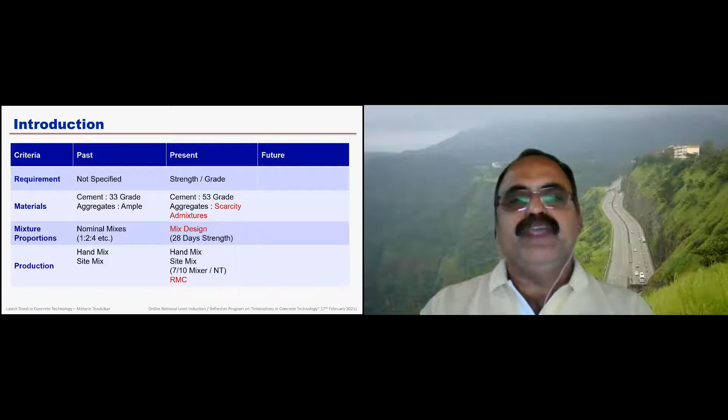Now in the present stage, we talk about strength of concrete: M40, M60, or sometimes M80 also. We have very good cement; the cement industry has had a revolution in our country, with latest plants available. But everything is not going in a good way, so we now have the problem of scarcity of aggregates. We don't have ample choice; we have to select proper aggregates from the available sources, whereas earlier that option was available. Admixtures are now coming into the picture—without admixtures we can't think of producing concrete today. Everybody is talking about mix design at the strength of 28 days.

Ready-mix plants are the latest technology in the last 15 to 20 years in our country. But what will happen in future? That is very interesting, and it has already started.

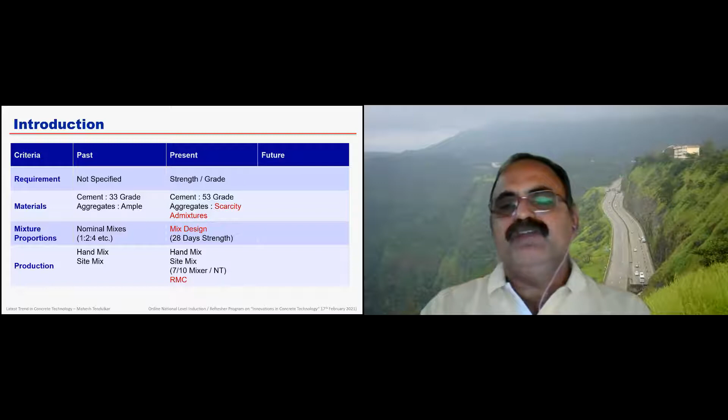We are now going back to performance-based concrete. It's not about what grade of concrete, but about durability of structure and service life of structure. We want the structure to withstand 100 years, 80 years. So we are going towards durability of structure, and for that we have to use supplementary cementitious materials. For aggregates, we are now producing crushed stone sand.

Natural sand is nowhere to be found, almost banned in full Maharashtra and even in some other states. So we have tailor-made admixtures. We have to specify our requirement, and then the admixture company will formulate admixture to suit our requirement. So everything is becoming performance based.

We don't talk about 28 days strength only anymore. Sometimes for one shutter we want 24 hour strength, 3 day strength, 7 day strength, 14 day strength, stressing strength, 56 day strength. So performance-based mix designs are now required. 28 day strength was only a criteria to fulfill the designer's requirement, but now we want strength at various ages to fulfill the execution stage.

In the precast industry, this is becoming more vital and more crucial. Hand mix, RMC plant mix, site mix are all there. The new thing is that dedicated RMC plants are now coming into the picture.

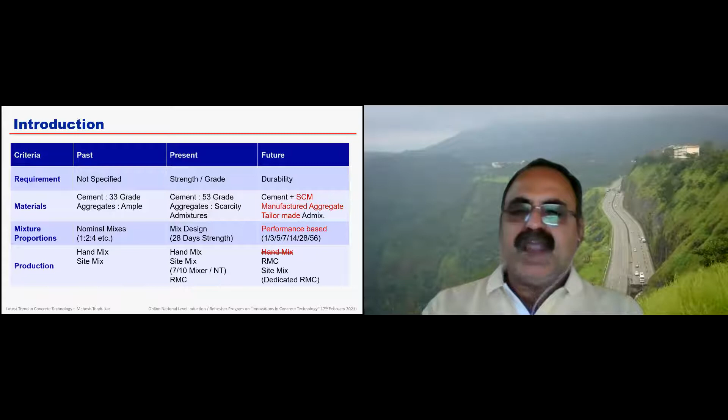But still, as a professional, I have a little worry. I feel our code should ban hand mix concrete, which is not yet done. Our code still allows hand mix concrete. It is very, very pitiful that we cannot have good durable structures with hand mix, and yet this continues into the future.

What about apart from material? Quality control - nobody was talking about quality control in the past, but at that time workmanship, supervision, performance of structure was excellent. Many times people doubt this, but we have structures built in the British era still standing in good condition, whereas structures built in the last 15 to 20 years are coming down.

Of course different aspects are changing because we don't have good workmanship nowadays. Laborers are not available. Good supervisors and foremen are becoming a community that is absconding from the site. Nobody knows what a foreman is anymore.

Then cube test is now being taken over by NDT. So how far is that NDT to be believed? Again, that is a big question mark. So this is what is changing.

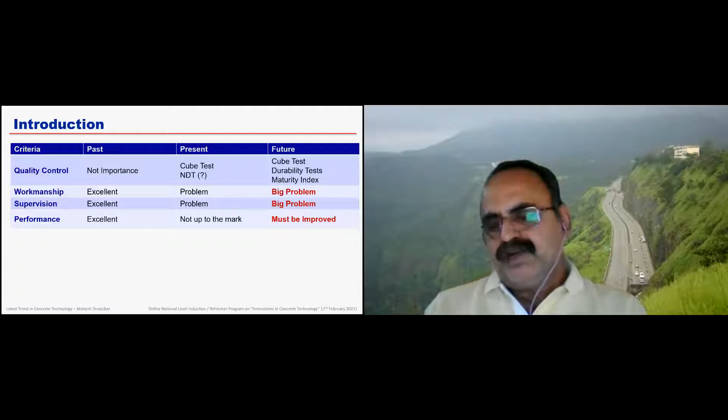But what will happen in future? Not only cube test, a lot of durability tests will be specified. Because if you look at the durability of structure, our main culprit will be corrosion of reinforcement - airborne chlorides, water-based chlorides, concrete chlorides, inbuilt chlorides. So we have to mitigate the corrosion aspect.

So a lot of tests for durability will come into the picture - water permeability, or chloride penetration ion tests. There are different tests that will come. Of course, a very new concept which will come is the maturity index - to know the strength of in-situ concrete by placing sensors.

So on one side we are doing a lot of innovation and modifications in materials and concrete production, but our main worry is going to remain workmanship - our training to these workers, training to supervisors. That will be very, very crucial when we talk about durable structures.

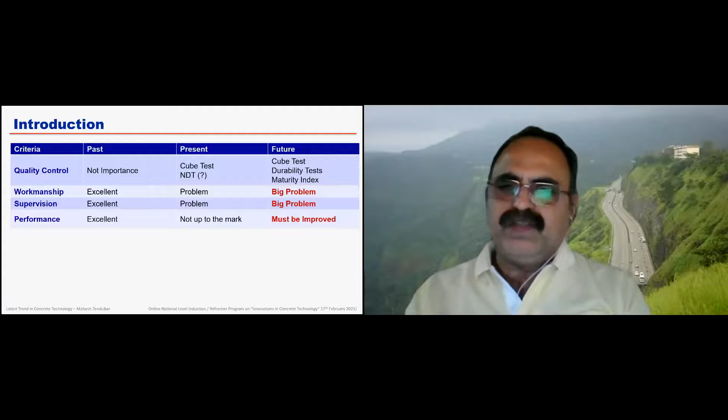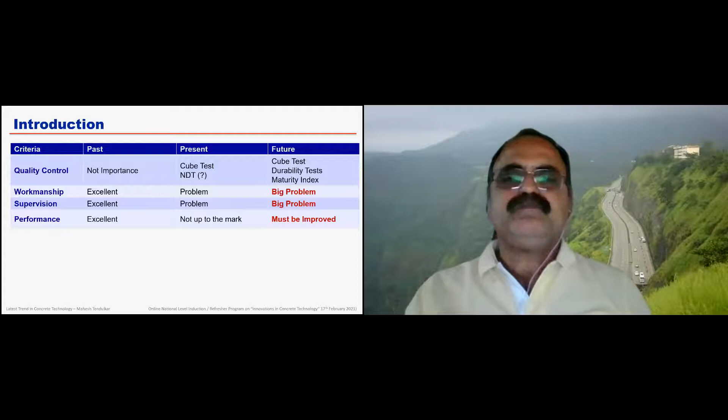So whatever we talk about as latest trends, we should equally talk about training for the ground force, which is very, very important in durable structures. I always say it is like KYC is important - but this KYC is slightly different in our case. Our KYC is 'know your concrete.'

One must know our concrete at the plastic stage, when concrete is green and not yet set. It has a life of about 3 to 5 hours. So we must know the properties of our concrete in the plastic stage.

At the same time, we should know about the properties of concrete in the hardened stage. Again, that is crucial. Cracking is a problem - we must know the microstructure of our concrete. This is very important when we talk about durability or the future.

So why concrete? Because if you see, concrete has a great future. I always say in the industry, civil engineering is the best profession, which we have experienced in this last 1 year of lockdown.

Everybody can work from home, but we can't work from home. We have to be there at site, and then only we can have this.

Any structure, whether it's a metro, infrastructure, airport, bridges, dams, of course all these are apart from residential, everywhere the core remains is the concrete. So one must know concrete in a very methodic and scientific way.

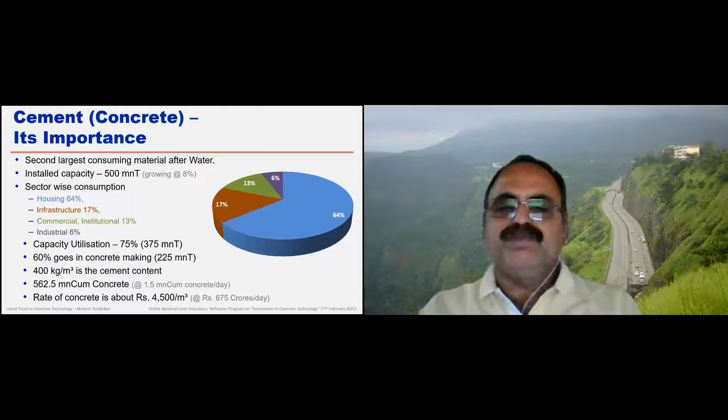And how much importance do we give to the development of our knowledge in concrete? Hardly anything. So this is very telling — we should have a lot of knowledge about this concrete. And this is what we are doing.

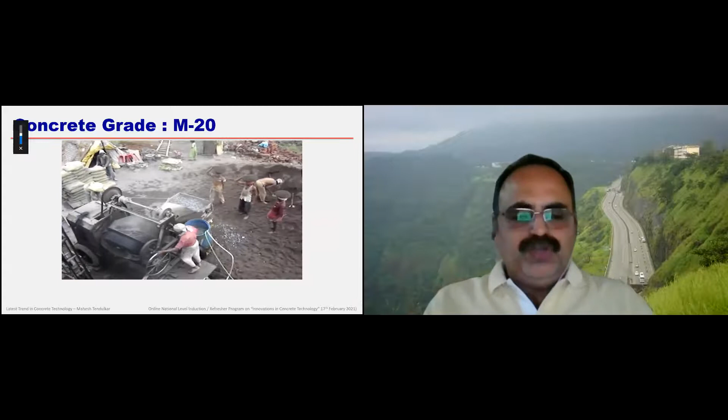So this is normal — I am showing you, not any project or commercial site, I am showing you by and large. I hope this video is slightly clear. This is concrete production in more or less all district places in our country.

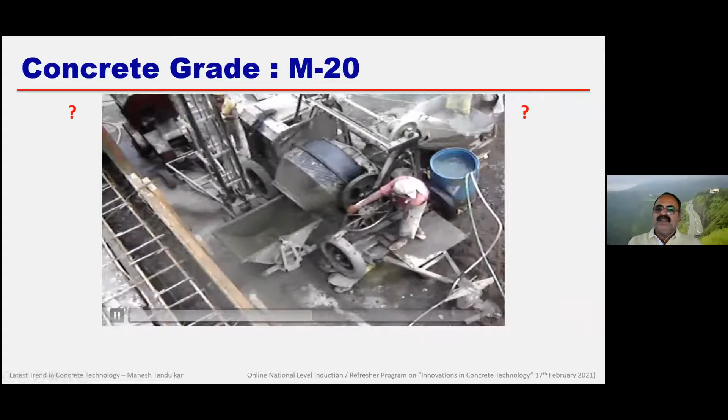So who is the quality control engineer? The person who is driving this mixer. We can't say much about this concrete — this is M20 grade concrete, one slab being cast in a district place in Maharashtra, in Nasik. You can see this concrete is poured in the slab, and being a civil engineer, there was a curiosity about what the strength of this concrete would be.

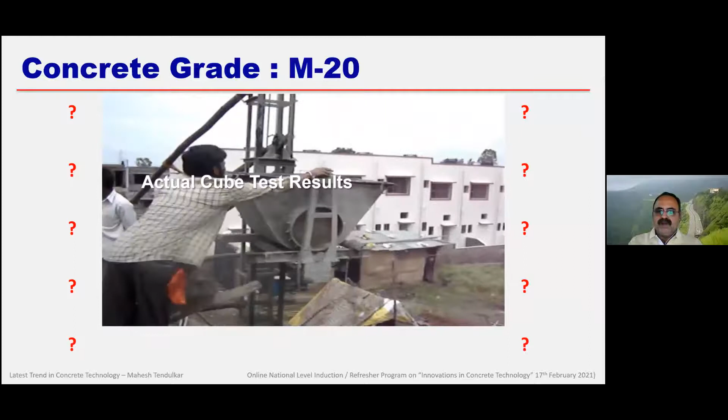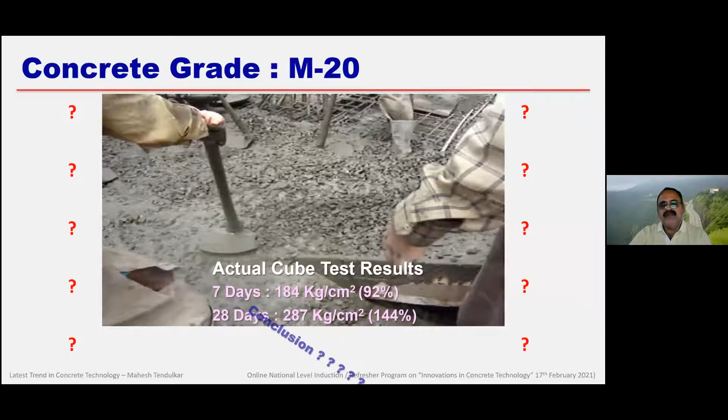So without doing any adjustment, we took these cubes for testing the concrete. And you will be surprised to know the strength was 90% in 7 days, and at 28 days it was about 280 kg — more than 25 MPa strength. So we get confused about what we can conclude from this, whether such workmanship is good or bad. We still say it is bad, but still it is giving results.

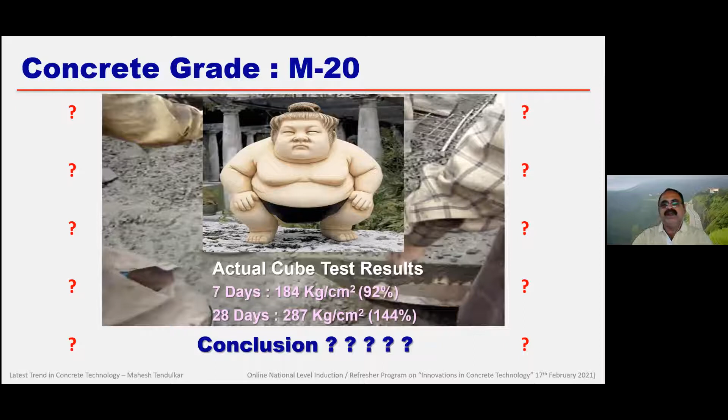So here we come to the first principle of durability — that concrete is not only about strength, durability of the structure is equally important. This is similar to sumo wrestlers: they have very good weight, they earn a good amount of money in sumo wrestling, but unfortunately their lifespan is very small. So we have to change our focus of concrete from strength to durability, and that is the first step for achieving any sustainable concrete structure.

Now, how have we changed our concrete mixing plants? Earlier we had these 7x10 mixers, then we moved to weigh batching arrangements. A lot of innovation is being done in this RMC plant.

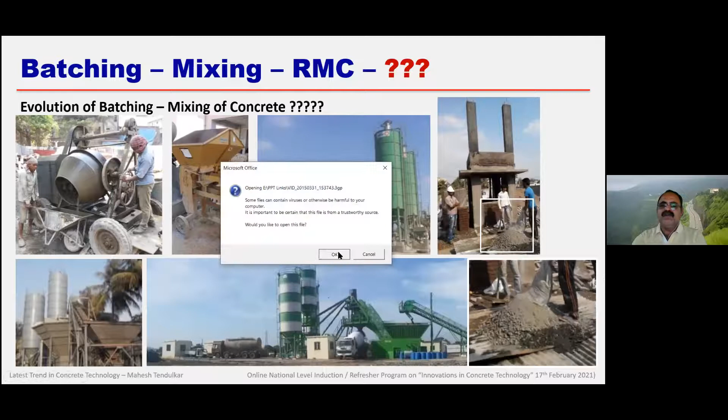As I said earlier, this is what we see in big cities like Mumbai, and now even B class or second tier cities have RMC plants. But if we go to other B class tier cities, wherever we cast these columns, we are still doing traditional hand-mixed concrete. So we are still not improved. This is one such site in a district of Maharashtra, a small city like Satara.

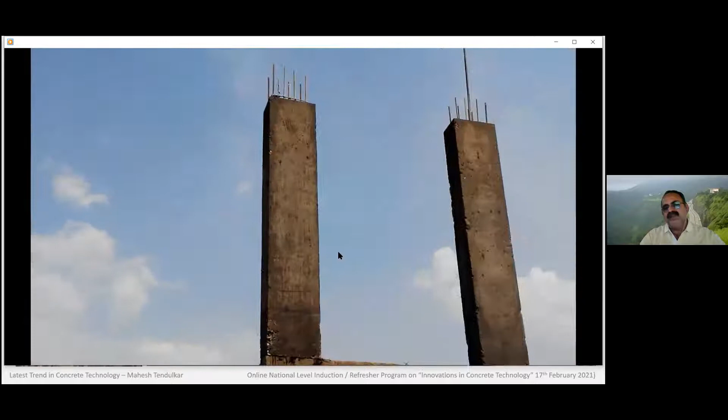We talk a lot about durability and water cement ratio, and if concrete is produced at site this way, then next day these columns, even if they still have a good shape, there is a complaint that edges are being broken.

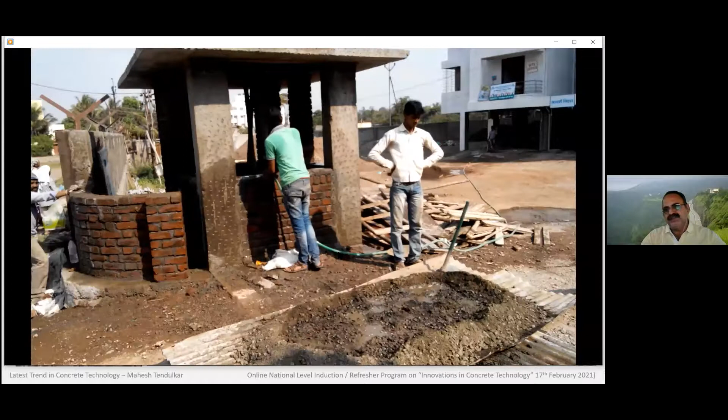Any column is the main compression member of our structure. Not only this small watchman's cabin, but the whole G+7 structure building is standing on such column construction. They might be using RMC for the slab, but column casting, which is the main member, we are still neglecting.

So we have to change this practice. I always like this quote of Mr. Abraham Lincoln: if we have 6 hours to chop down a tree, I will spend the first 4 hours sharpening the axe. This is where we civil engineers, especially at site, fail.

We never plan. We had our laboratory, and many people used to come for the mix design and say we want concrete mix design for a particular grade. And when they want it, they say tomorrow we want to cast the slab, tomorrow we want to cast the structure. So we don't plan.

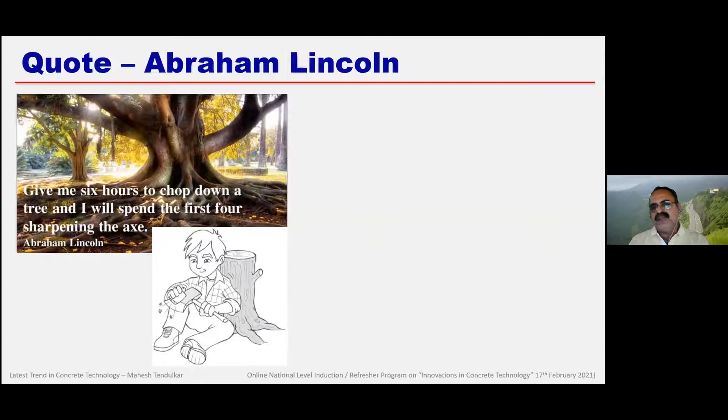The first and very important thing is that we must plan everything well in advance. This is what we call the planning stage of our structure, and then we go ahead once everything is ready.

I personally experienced this in the first Mumbai Metro project. We were doing planning for almost 9 months, more than 9 months. Still, we could achieve only about 70% planning at the ground. So we had to change some strategies at the last moment because of unforeseen circumstances at site. But still, planning is very important, which is very, very poor in our case.

Once we are thorough in planning, we can go to the execution stage with great confidence, and we can definitely have good structures.

When we talk about this latest trend in concrete durability, as I already said, our first point is we have to arrest the corrosion of reinforcement bars. Of course, that itself is a big subject, so I'm not going to cover corrosion, but as concrete, we have to protect our concrete, and steel should be well protected by concrete. Then only our concrete protects the steel from pollutants from the environment like carbon dioxide, oxygen, sulfate, chloride.

This is how we protect our concrete and protect our steel, which takes the major tension of our structure, while we take only the compression from the concrete point of view. So any durable structure needs planning and designing right from the structural design and detailing.

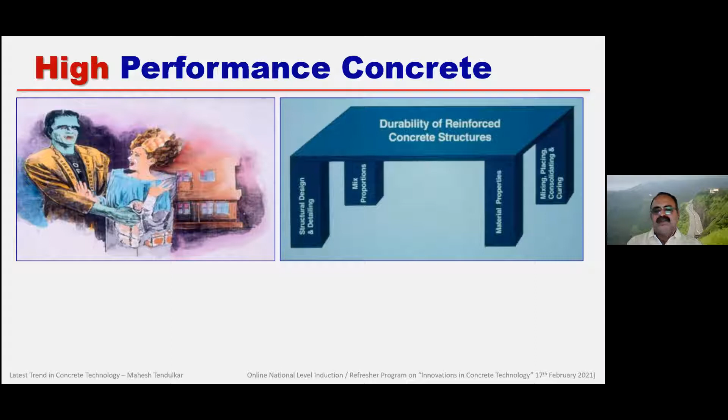And last but not least is all these operations of production of concrete, right up to batching, mixing, up to curing, that is very important. So if you don't have proper curing, definitely the whole exercise is waste. So whenever there is a high performance concrete, I always say first let us understand the basics of concrete. Unless we understand basics of concrete, we can't go to the high performance concrete. It is like without graduation, we can't go to the post graduation. This is a very basic thing I say.

And when we talk about this durability, our code is under revision. There are a lot of durability codes available internationally, and our code at present is giving the environmental exposure condition. Earlier there were 3, nowadays there are 5 conditions: mild, moderate, severe, very severe, and extreme.

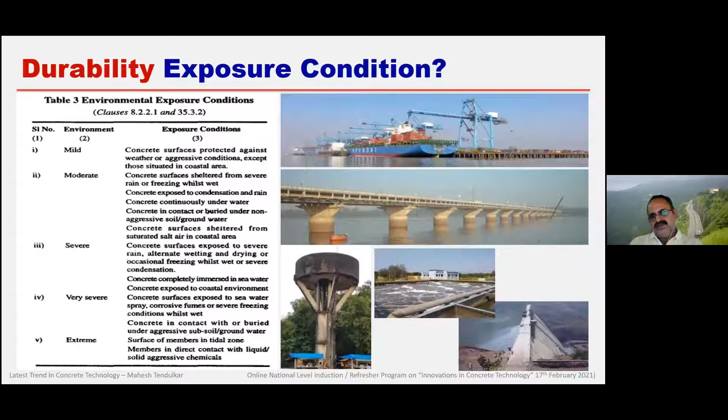Those along the coastal area have no choice but to select from severe or very severe condition. Extreme is like a tidal zone concrete where all these sea link projects are happening, with alternating wetting and drying by the tidal action, sewage treatment plant, lot of things. So one must design according to their exposure condition. We don't have to bargain on this. If it is severe, we have to follow the severe code, and according to that code, we have to design our concrete right from the planning or designing stage.

Forget about this RCC, I'm just giving one example. If it is along the coastal area - and I think today our college is also from this coastal area - one should not design any concrete less than M30. The code gives the guideline that for severe condition, our minimum grade of concrete for RCC should be minimum 30, and PCC is 20. But still hardly any normal bungalow construction or building construction is following this. They are still in the era of M15 and 20, or 20 and 25, not following this code and this guideline.

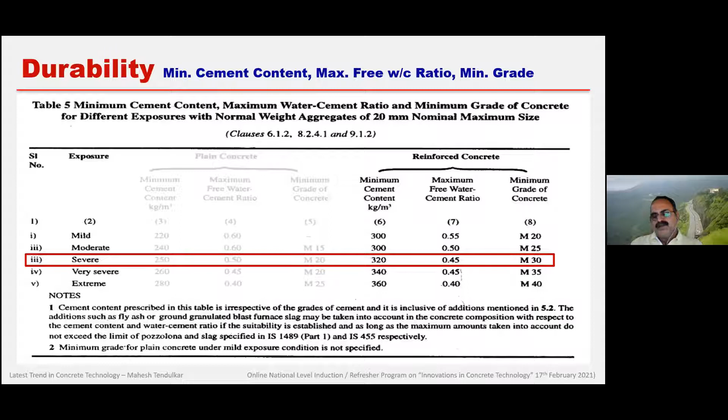Again, minimum cement content, cementitious content, is required to take care of proper hydration of concrete within the concrete mass. Not only that, it will give some alkalinity to the concrete. So pH value of concrete should be around 12.5 to 13, 13.5. When the concrete is alkaline in nature, it will protect against carbon dioxide and have proper arrest against carbon dioxide. So it will protect steel. As long as this pH value is more than 10.5 or 11, it is like real protection to the reinforcement bar. The moment this pH value of concrete falls below 10, 10.5, then steel within the mass of concrete will start corrosion, and there our problem will start and multiply if we don't take proper precautions.

So coming back, what are the latest trends in cement and supplementary cementitious material? We talk about that first. Now we always say cement is engineer's choice - this is what we see in a lot of branding and advertising. But really, whenever we go to the site, whenever we go to the field, the person executing the structure has very little say in selecting the proper cement for his structure. I will just explain this, why.

For the common man, they always believe in advertising and branding. That is the reason cement companies are spending a handsome amount of budget on advertising - a lot of cricket matches, boundaries, everywhere you see this branding by cement companies, hoardings. One such bag says 'jung ki no entry', that it is a rust-proof cement. But practically speaking, cement has nothing to do with corrosion. Basically, concrete should be proper and concrete will protect against this corrosion. But now recently I understood that all such punch lines on cement bags will be banned by our IS code, which is a rightly good step. So cement is cement - how you make concrete is the skill of an engineer.

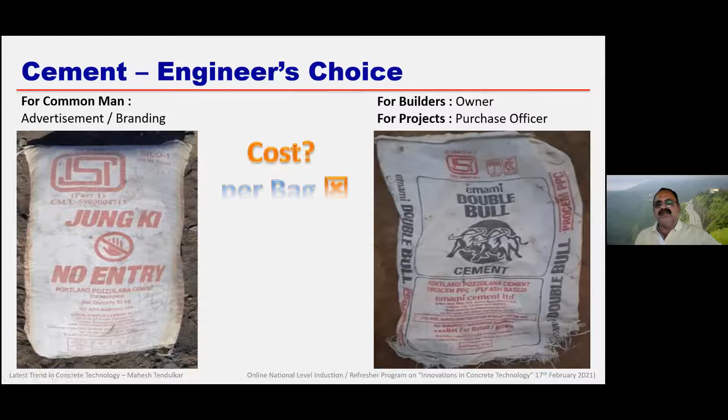Then I come to one, of course a good quality cement, Emami cement. Earlier, one brand was very famous in cosmetics; now they have the cement. So again, this is how a common man is attracted by branding and advertising. When we come to the builder segment, or the owner, or project purchase officers taking the decision - how do they take the decision? We have a very simple logic: take the quotation, whichever is cheap is the best. We compare the cost of the bag, whether it is 300 or 320 rupees per bag, cost per metric ton, and then we select the best cement.

Whenever we are talking about big projects nowadays, not only projects, even developers have started, we never talk about the cost of cement per bag. We convert that into cost per cubic meter. That means if particular X brand is having say Y cement content, other brand will have Y plus or Y minus cement content. So we should be ready with the concrete mix design with the new cement brand, with the properties of new cement, and then arrive at how much cement is required for that particular concrete, and then decide what is the cost per cubic meter.

So it may happen that cement per bag is 5 rupees cheaper, but we may have to put 30-40 kg per cubic meter extra cement. This is where we land in trouble. So we have to compare cement per cubic meter. Not only cement, I will suggest we can compare admixture based on their dosage. Everything should be compared per cubic meter after achieving the performance of that particular material in concrete.

Then sometimes we see that sulfate resisting cement is recommended when sulfate attack is there. Yes, it is a good cement, but there is a caution. The latest study has proved that if sulfate and chloride both are present, SRC cement is the worst cement, and sometimes better than that is OPC.

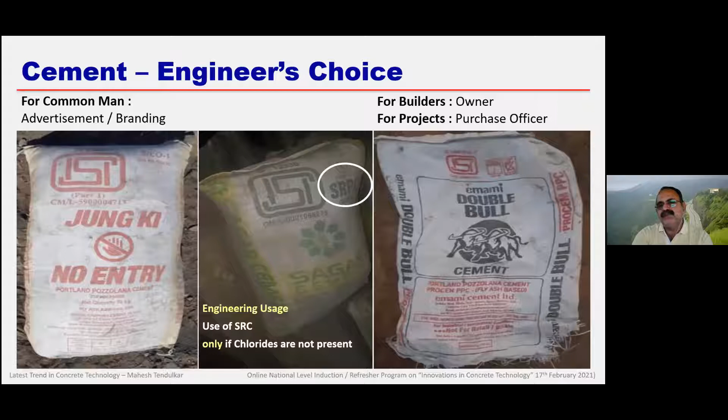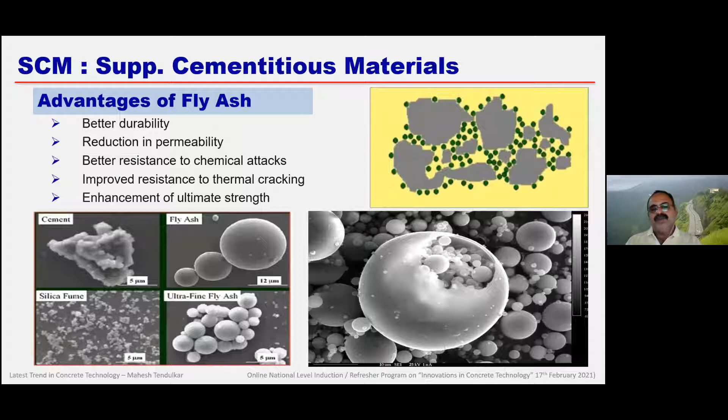And not only fly ash, there are other supplementary cementitious materials like GGBS, microsilica, ultrafine fly ash, or ultrafine GGBS. Fly ash is one of the best materials amongst these because it has a spherical shape. Whenever there is a spherical shape, it will give better cohesiveness, and the rheology of concrete will be better in case of fly ash based concrete. Now, what is the beauty of this fly ash?

Now, this fly ash, I'm going to show you this chemical composition in the next slide. But before that, the beauty of this fly ash is this is normal OPC hydration process.

Water reacts with OPC or silicates from the OPC and it forms calcium silicate hydrate and calcium hydroxide. Calcium silicate hydrate is giving the strength. Calcium hydroxide, or Portlandite, is a weak crystalline structure, so it's not that desirable in concrete as far as strength and durability is concerned.

So what is happening? This fly ash will interact with or react with this calcium hydroxide to again produce calcium silicate hydrate. That means unwanted calcium hydroxide will be converted into calcium silicate hydrate, and thereby it is called a secondary hydration process.

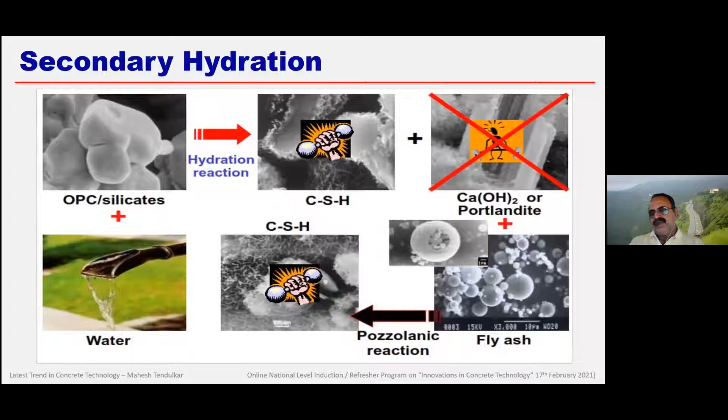So generally they say if you compare 56 and 90 day strength of concrete of fly ash based cement, it will be almost 15 to 20% higher than OPC concrete.

Now, these are the different cementitious materials, supplementary cementitious material. First is OPC, so these are the oxides in OPC. Obviously lime is maximum, say 65, silica is 20.

Second supplementary cementitious is GGBS. It has got both cementation means silica as well as calcium oxide, so this is like secondary as well as primary hydration. There is lime along with silica.

Fly ash, if you see, has hardly any lime, but it is very rich in silica. So fly ash is a purely supplementary cementitious material.

But of course, there is some coal which produces what we call C-class fly ash. There are some coals from foreign companies, imported coals, so they have about 20% lime and 35% silica. So they are also like in between GGBS and fly ash.

And the rest, which are rich in silica oxide, like silica fume, rice husk ash, bagasse ash, they have high silica and are generally preferred in high grade concrete of 50, 55 onwards grade of concrete. This is the same hydration process which you have seen earlier in the chemistry form.

Here it is mentioned C3S and C2S both give calcium silicate hydrate and calcium hydroxide, and this calcium hydroxide will react with reactive silica from the supplementary cementitious material to give calcium silicate hydrate.

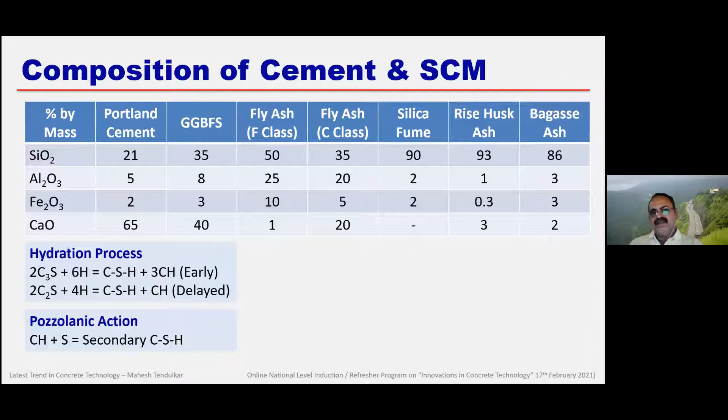So this is how it is beneficial to improve the performance of concrete, mainly because of improving impermeability of concrete, reducing the water permeability of concrete, or reducing chloride ion penetration of concrete. So a lot of things can be tested when we test for durability.

So whenever we are doing this testing for durability, we never test at 28 days. It can be tested at 56 or 90 days. So all these things we have to see for the later age gain, strength as well as properties of durability.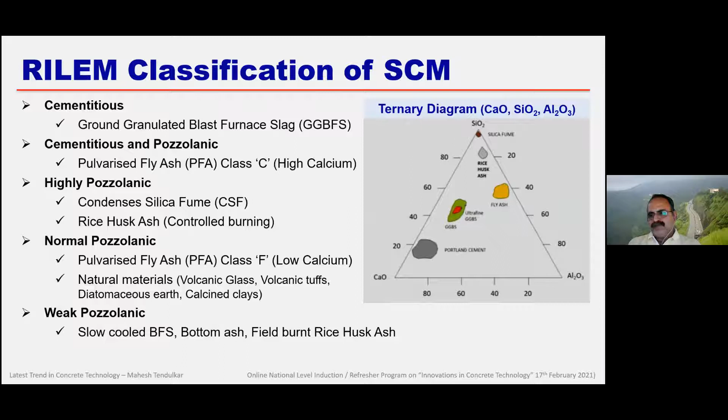So whenever we talk about the service life of a building, we are not going to construct the complete building within a span of 2 months or 3 months or 1 month. That is the reason we are now changing the focus of all tests from 28 days to higher age strength, for 56 or 90 days strength.

This is very interesting when we talk about high grade concrete. It is called the interfacial transition zone, or ITZ.

So along with the aggregate, this is the hydrated product of cement, and this is the aggregate. Along the aggregate, weak calcium hydroxide accumulates in this weak zone. That's why whenever we test concrete in the cube test, we always find a failure of bond strength.

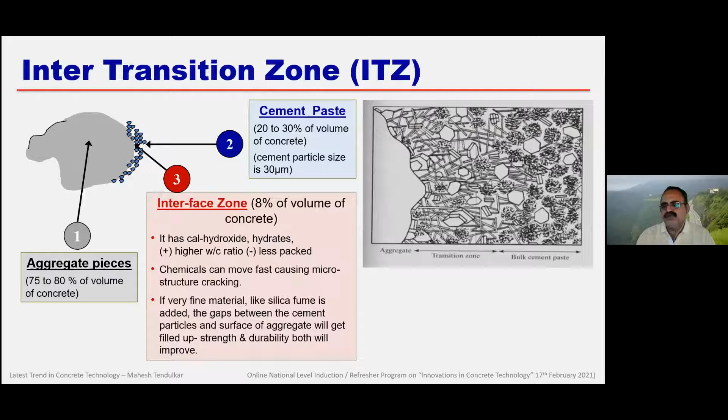This failure is mainly because of accumulation of calcium hydroxide in this transition zone. So whenever we talk about high performance concrete, high grade concrete, we have to improve this zone, the ITZ, by reducing calcium hydroxide and converting it into calcium silicate hydrate. This zone is not small - out of the 20 to 30% paste, around 6 to 8% is this interface or transition zone. This needs to be improved when we want to test for high performance concrete.

Then we come to the last and important material, the chemical admixture. It has mainly two properties. One is to increase workability so concrete can be placed easily. Earlier we used to concrete with 75mm, 80mm, 100mm slump, but now we want flowable concrete. The effect of admixture is to increase workability so concrete can be transported in a transit mixer for longer distance.

Also, when we talk about mass concreting, we have to delay the setting of concrete to avoid cold joints, so we require the retarding effect. So two main effects: the plasticizing effect and the retarding effect. We require more plasticizing effect and less retarding effect, but in case of mass foundation, we require slightly more retarding effect. So these admixtures are now termed as super plasticizing retarders.

Instead of having two different admixtures with their own experience and formulation, they add the desired dosage of retarder into the plasticizer and give it to us as users. So these are the two main benefits. Of course, performance of admixture is one part, and second is the base of the admixture.

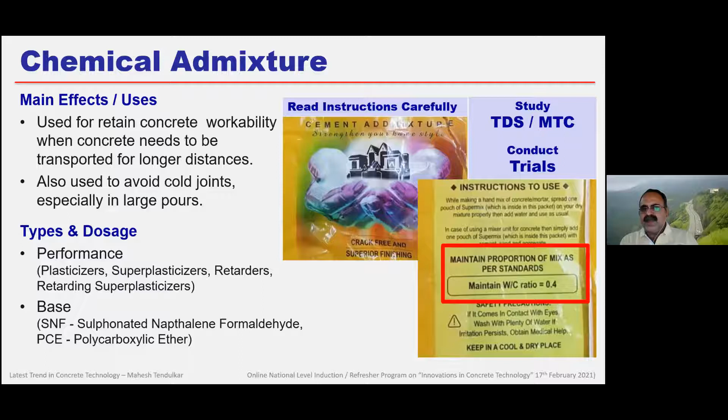First you experience it, study it. We are engineers, we are professionals. Study the technical performance, then conduct the trial, and only then use it. Now, before going further, a very simple thing: what is the difference between SNF and PCE? I just want to highlight this with one slide.

These admixtures are doing magic only based on physical properties. In normal concrete, without any admixture, because of flocculation, cement particles have equal positive and negative charge, so they flocculate and block water - they entrap the water which was supposed to be available for workability of concrete. But with admixture, it is not happening.

Even though we have added this water in concrete, practically that water is not free or available for concrete workability. So when we add admixture, admixtures give equal negative charge on the particles of cement, so they repel each other and we get extra water available for workability. Now, how this charge is applied, how the cement particles repel, and how much extra water is available, that is the base of admixture.

Normal admixtures like SNF may release 10%, 15% of water that was entrapped. But nowadays with PCE admixture, we can go even 25, 30%. Somebody even told me they have a product which can release 40% of water. So whenever we are going with low water cement ratio, say 0.4, 0.35, 0.32, even sometimes 0.25 or 0.22, we require a special kind of admixture with the highest dispersion properties, releasing entrapped water in concrete, and of course the slump is increased.

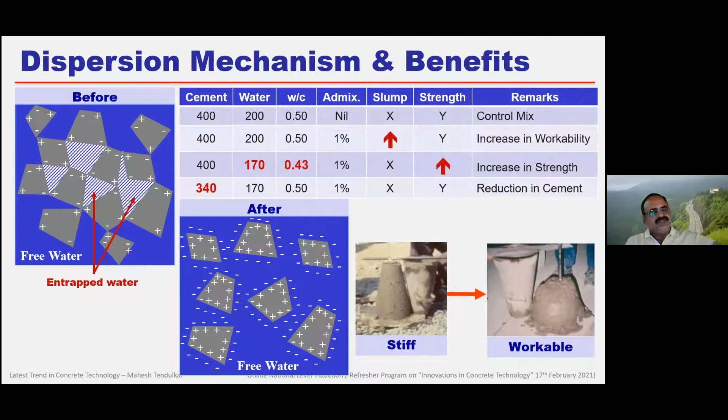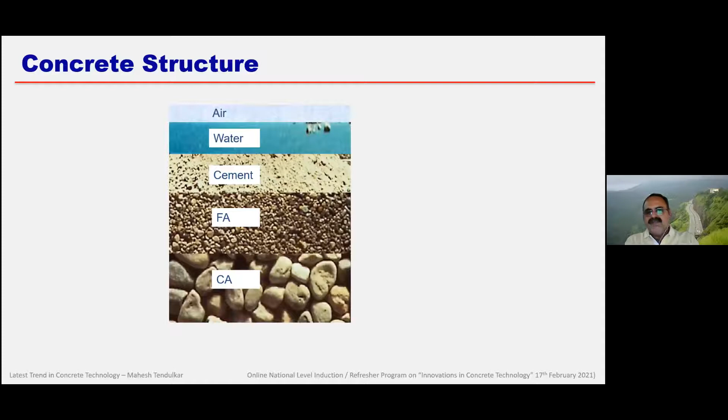Then after cement, cementitious materials, and admixture, the next and major component in our concrete is the aggregate. Aggregate forms almost 70% of the volume of concrete, but we never talk about aggregate. The reason is they are cheaper than cement and other products. But when we are talking about high grade concrete, high performance concrete, aggregates are becoming very, very crucial.

If you closely monitor the failure of a high grade concrete block or cube, sometimes you will find the failure is through the aggregate, not a bond failure, it is aggregate failure. So we have to select the proper aggregate, particularly in high grade concrete, say M50, M60 onwards. Selection of aggregate is very important, and not only selection, I insist that one must visit the crusher and understand the manufacturing process, and confirm that the quality of aggregate produced there is up to our required parameters.

So these are very common aggregates. Nowadays, fine aggregates are also crushed. Coarse aggregates are also made through VSI, giving cubical aggregate, single size aggregate. I'm going to come to that in the next slide.

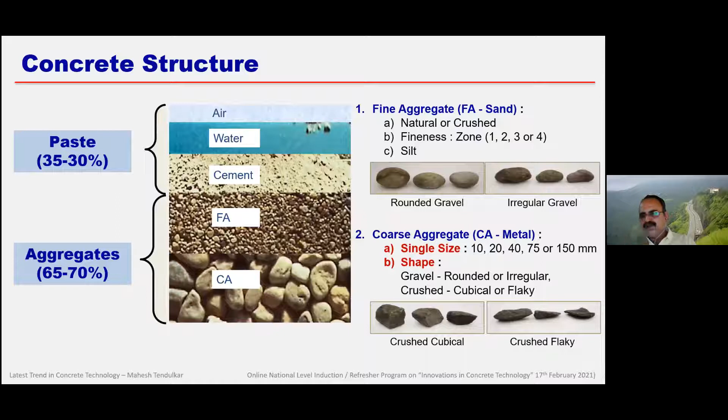I always say that if somebody is working on a project, they should work like this: this is one of the mega road concrete projects, a 100-kilometer long road project, and surprisingly, the crusher was not installed, while all other equipment was ready—batching plant, RMC plant, transit mixer, placer boom—but the crusher, which is the heart of the project, was not ready, and the whole project got delayed by 3 months. Just to give the idea, I will again repeat, every professional should visit the crusher. If there are any faculties, I suggest instead of taking along just the site team, we must take the students to visit the crushers also. That will be very important.

I just want to give you one glimpse about a crusher.

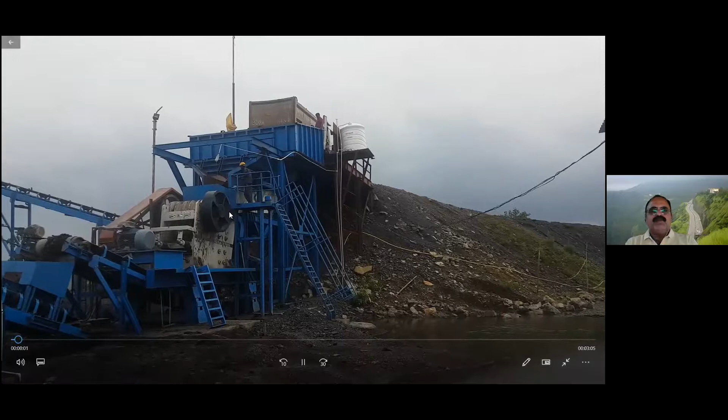Generally in our country, the latest crushers are called 3-stage crushers. The first stage is the primary crusher, which was there earlier also—it is a jaw crusher. The purpose of this jaw crusher is to split the big boulders into smaller rock of 60mm or 80mm, which is then fed to the crushing equipment. This is the main crusher, which we call a cone crusher, where the aggregate is crushed. There are two parameters: the jaw crusher brings down the aggregate size so that proper aggregate size is fed to the cone crusher, and the cone crusher only breaks the aggregate down to smaller size—mark the word breaking or reducing the aggregate size.

But what we want in high performance concrete is the shaping of aggregate, so VSI is the tool for that. I want to highlight one thing here—this is a vibratory screen, which is important to get single size aggregate. Here you can see this is the output of the cone crusher, which is non-VSI aggregate—they get all sorts of shapes. After this crusher, the next feed goes to the next crusher stage, feeding the VSI crusher.

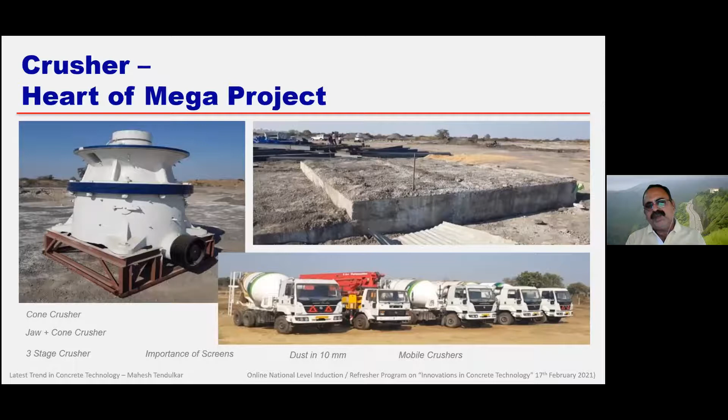So this VSI is a shaping tool, and this will produce the proper aggregate from where we get single size cubical aggregate, which is desirable for high performance concrete. I am sure everybody must understand the process from where we are getting aggregates and whether aggregates are being produced by proper process of manufacturing.

So this is the old way crusher. Now, as I said, these are the new crusher - cone crusher, vibratory screen. And if you see, flaky and cubical aggregates are being produced from the jaw and cone crusher. When they are taken to VSI, we get proper cubical shape.

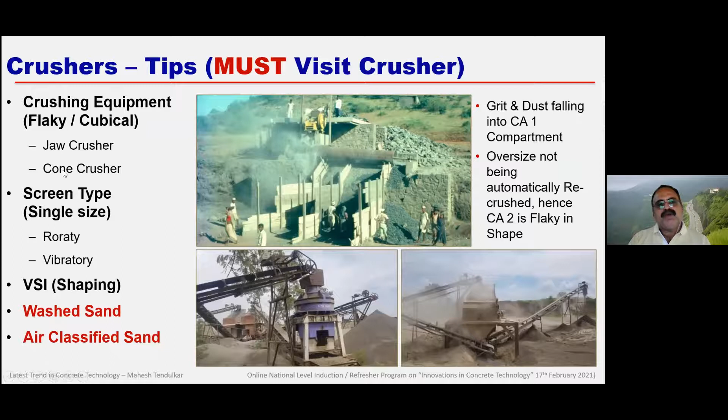If we have proper screen like vibratory and rotary screen - here you can see the bottom one is a vibratory screen, you can see the mesh, it is a wire mesh and square, whereas these are the old mesh which is a rotary screen and they are circular. That is the reason if you compare the aggregates from such kind of VSI with the vibratory screen, we get almost 85-90% purely passing from a particular size, 10 or 20 mm.

Earlier we were not getting it, but nowadays I have seen many sites, many places, even C-class cities in our Maharashtra, we are having such kind of crusher. So this is very important when we talk about this crusher. And the last two points which I have highlighted are very important, which is the latest development in the last maybe 5 years or 2-3 years.

It is wash sand, air classified sand. This is very important, especially for high grade concrete, say 60-70 onwards. As we know there is a limit of 75 micron silt, so there is a lot of silt in our crushed stone sand, and that is very difficult to control in the normal crusher.

But what happens when we go with a higher grade concrete is that it will absorb a lot of water and water demand will increase, admixture will not perform. So a lot of problems will come if we cannot control this 75 micron silt in our concrete. But when we go for this wash sand or air classified sand technology, they suck out this 75 micron and bring it down from 15% to 5% or less than 5%. So this is a must product when we go for high grade and high performance concrete.

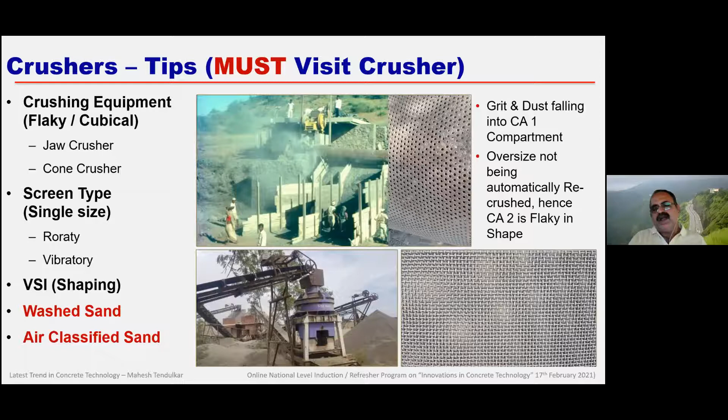So I just want to mention again, there are imported plants, and this is one of the Indian plants. In small cities like near Kolhapur, I have seen this. So I will show you the system.

So this is the best technology available. This plant was also manufactured from Maharashtra, somewhere from Satara. So indigenous plants are also available, and very soon - surprisingly, many users, construction sites, are not aware that such kind of plants are installed in their nearby area. That is the reason I am repeating this: we must visit a crusher and understand the manufacturing process.

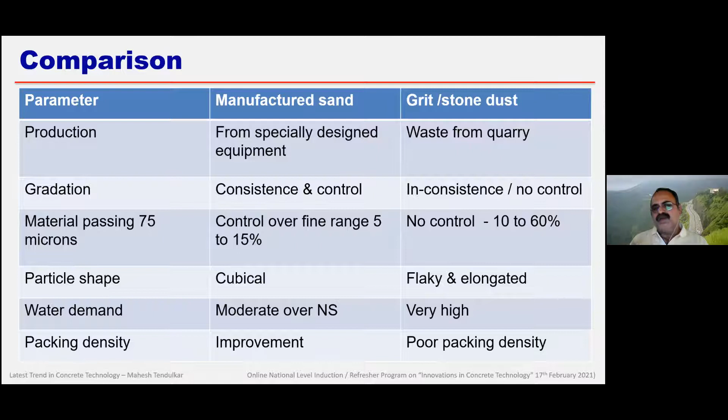Now we come to the next point, that is the RMC plants. So we have all the latest plants - all these RMC plants are very good, their equipment, capacity wise, is excellent. They can produce concrete up to 3 cubic meters in one batch. So you can just imagine getting a production of 90 to 100 cubic meters per hour, targeting big pours of 1000, 2000 cubic meters in one go is not a big challenge nowadays.

Earlier it was - I still remember our first concrete pour of 230 cubic meters, we were doing it for almost 20 hours. So that was a big challenge. But nowadays, capacity wise, we are sure, and quality wise again it is the best plant - we have a good system, hardly an error of 1% in batching error in cement or 3% in aggregate. And most important is the mixers which they use - they are beyond compare. So this is how I want to show you one clip where this twin shaft mixer is being used.

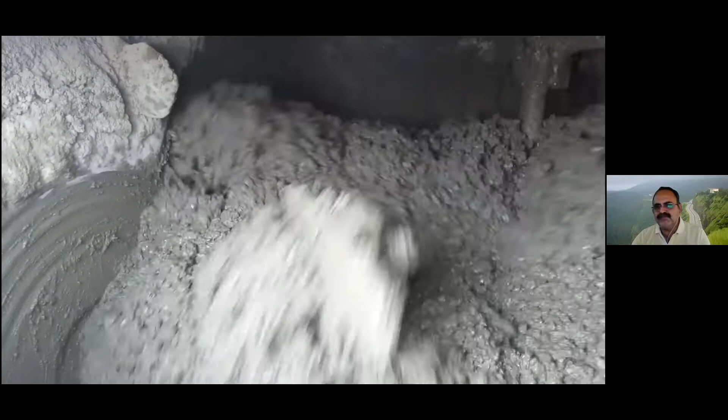So concrete mixing of low water cement ratio with effective admixture, you can see. This is for demonstration purposes. After addition of admixture, it will perform in a much better way. These are the latest mixers available, twin shaft mixers, and they are performing excellently, producing good quality concrete. They are easily available, and of course while mixers themselves are imported, the plants are available in our country.

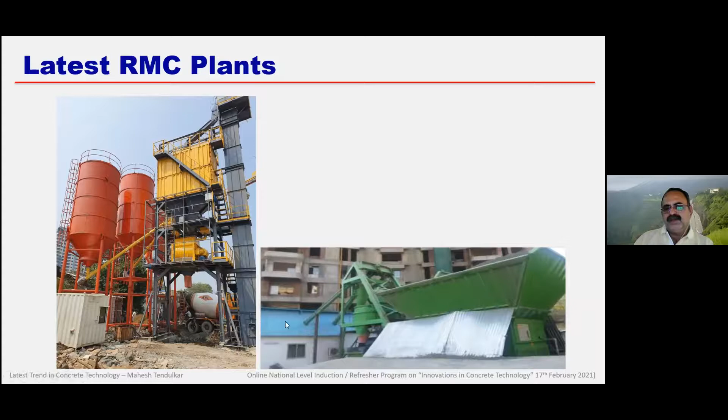Of course, there are some plants which can be used for direct pumping, for a small site where a residential building is there. The capacity isn't that great, 18 cubic meters per hour, producing 10 to 12, so every day we can produce 150 cubic meters in a 10-hour shift. They can directly pump. You can see here there are no silos. Screw conveyors go into the godown, and from there bags are fed to the screw conveyor. Of course, there are tailor-made plants available.

Again, this plant is along with the twin shaft mixer, and it can also produce about 18 cubic meters per hour. These are very portable plants. Basically, if you see, it is like one small container -- this plant comes in one container.

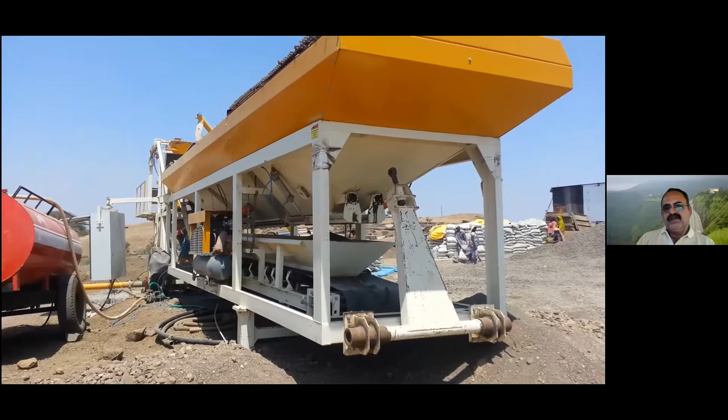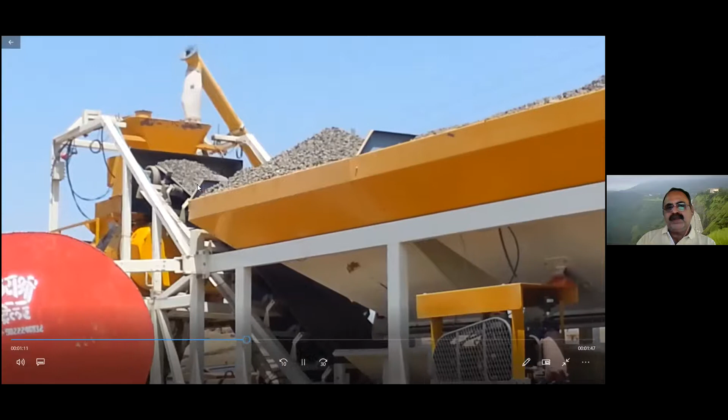I can show you one here. This is basically used for road projects. You can see this is a plant and it can be towed by the tractor, it's such lightweight. With wheels, it can be towed by a tractor, and here there are 3 to 4 bins that can be given. Aggregate will be loaded here and then fed to this twin shaft mixer. Here now aggregate is being loaded. So tailor-made plants are also available, and now we can have very good quality control and produce good, under-control concrete for various sites.

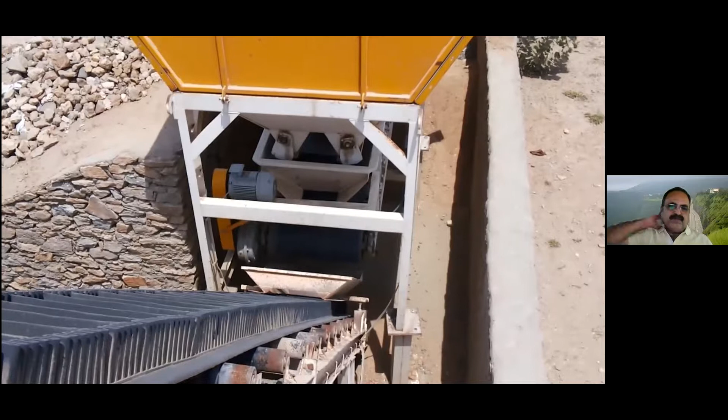Of course, this plant I want to highlight only to show that if there is space constraint, it can be taken care of by a special kind of conveyor belt. This is one area where there was a horizontal rise. See, this is such a steep conveyor belt, very difficult -- sometimes you can't take aggregate up this steep conveyor belt. So here, if you see, this is a special conveyor belt in this plant, and now it is taking all this aggregate into the mixer.

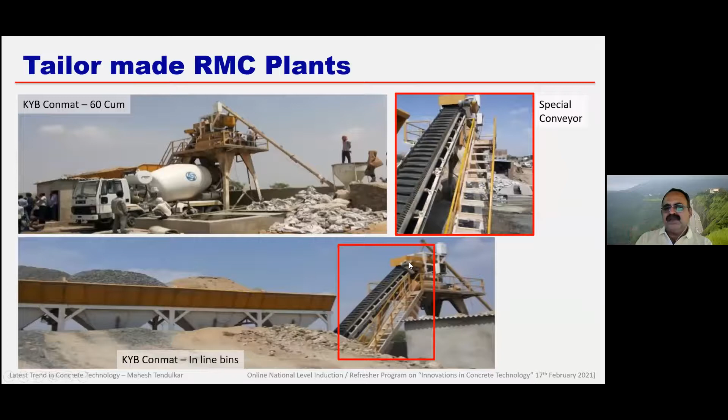So we have a lot of engineering in the mechanical division which can support our concrete production in these RMC plants. So all these latest plants -- whatever problem you give, you will get a solution. This is what tailor-made plants and tailor-made solutions are available for all sorts of projects.

Now, my main question or main worry for construction sites is RMC used for casting of columns. It's a big question even in cities like Mumbai. The reason is we always want to get mechanized, we want quality, but at a cheap cost. Now I want to highlight one case where one building had a transfer girder at, I think, the 4th or 5th, 7th level. That transfer girder column -- let me show how the concrete for this column was produced.

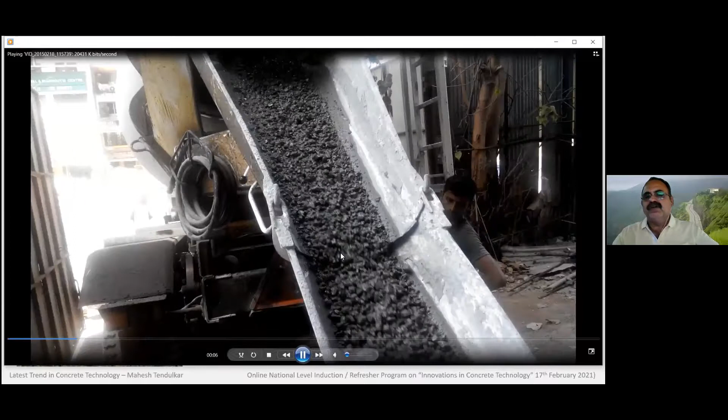When this concrete was coming to site, the quantity was less than say 20 cubic meters for one column. So they placed this concrete not through the pump, because pumping would be costly. Instead, they took this concrete in wheelbarrows. Just imagine concrete coming in a 6 cubic meter transit mixer of M60 grade concrete, which has a shelf life according to me of 3 to 4 hours. It is taken in a wheelbarrow, and then this wheelbarrow is taken to the desired location.

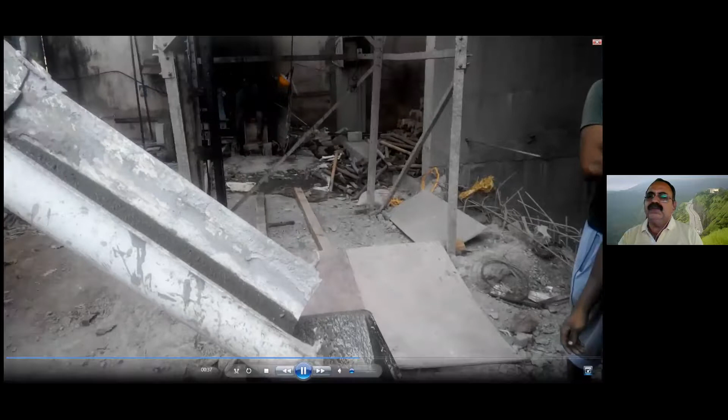This is how it's taken in the wheelbarrow, and this wheelbarrow will go to the site on the 7th floor by hoist.

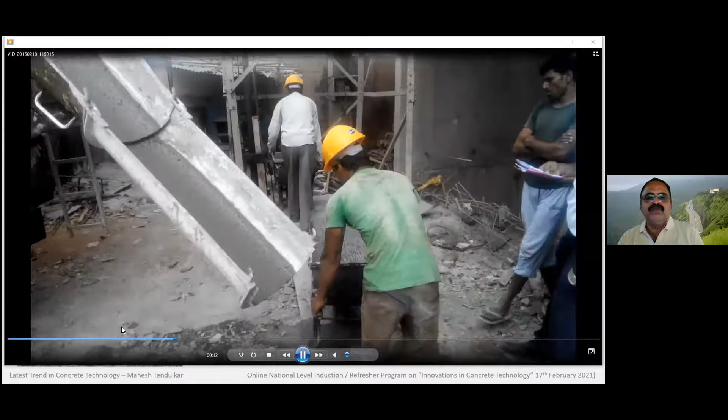So this is now going in the hoist wheelbarrow. This is how we are transporting the concrete coming from the mechanical way, and now you can see this wheelbarrow is going to site.

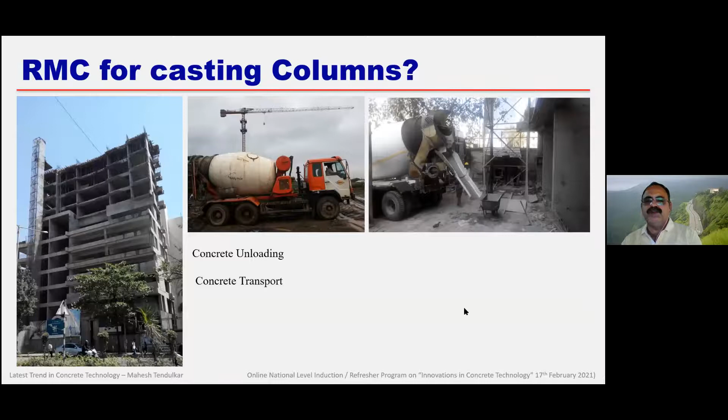Obviously such transit mixers cannot be unloaded within 3 hours, which is a very large time. By that time our concrete will get problem, and when we tested the concrete, we took the core from that particular column, because if there is a drop in workability, the transit mixer driver will not tell you, he will simply add water and unload the concrete.

Whenever we are taking the cube, we take it from the initial load, so we will never point out this mistake, but the consultant was keen to know the in-situ strength. So we took the core, and found that the core strength was almost 18 to 20 MPa lower than the desired strength. Then the whole retrofitting of the column was required to be done.

So whenever we are doing RMC, be cautious, use the complete system. Don't use the half-phase system. If you are taking the concrete transit mixer, it has to be pumped and placed in position as early as possible.

Then the last point of today's topic, or rather the second last topic I want to highlight, is the laboratory. All these developers, all these constructing agencies, are very much conservative in spending amount on the site laboratory.

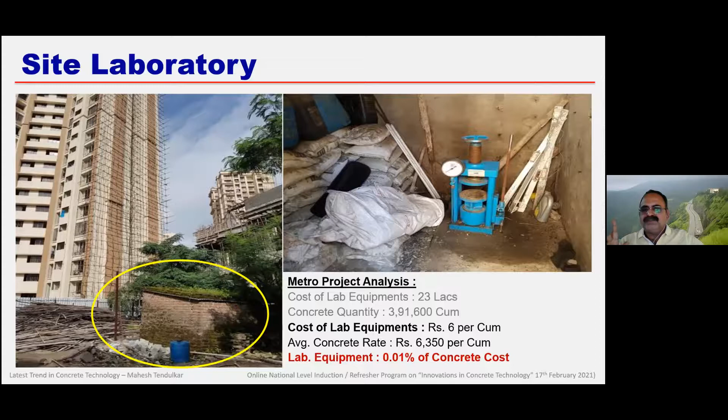So lab equipment was coming to 6 rupees per cubic meter. And if you consider that their average concrete cost was 6350, lab equipment cost was 0.01% of concrete cost. But we never give attention to this part.

According to me, any site, whether it is site-mixed concrete or RMC concrete, must have bare minimum testing facility. If we are producing concrete at site, sieve analysis with minimum 4 to 5 sieves is required. Find the specific gravity by pycnometer, weigh balance, hot plate, oven or microwave to find moisture absorption, find the silt content, minimum 18 cube molds, and a slump cone set. Only then can we have proper quality control.

So whenever we say we are in the jet age, we are having very good concrete production, we are constructing very good structures, but we should equally be cautious about developing small site laboratories at site.

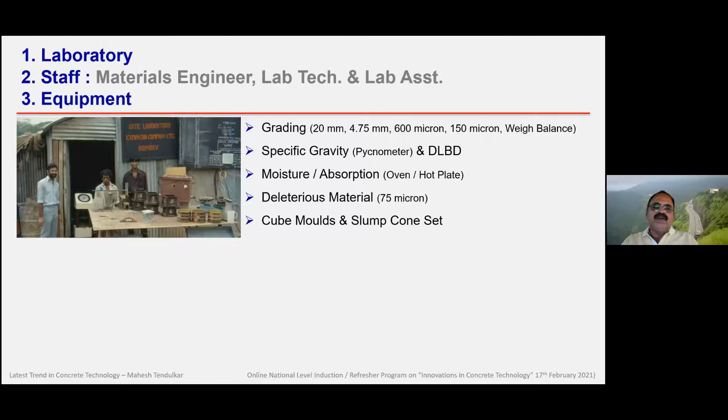Now, whenever we are producing any concrete structure which will last for 100 plus years, all points like material, mix design, batching, mixing, transporting, all steps of concrete making up to curing are important. Even though we procure ready-mix concrete, we can eliminate only the first 4 or 5 steps. But placing concrete, compacting concrete, finishing and curing concrete, this has to be done at site.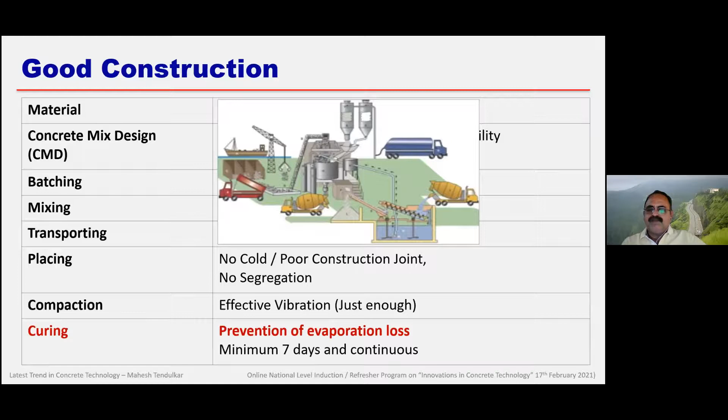So it is not that because RMC is there, magic happens and our structure is automatically good. No, it is not like that. RMC can supply very good concrete, but we can spoil that concrete if we place it improperly, if we don't compact it properly, if we don't cure it properly. So good construction, any durable structure, is only durable when all steps are taken care of in the process.

Just before coming to the end, I want to show you how it works. Suppose this is one of the road projects. So what we are doing is curing this concrete with plastic sheets. We are even doing this for buildings also. Now how does it help? Just see the video, you'll understand. Whenever we place this plastic sheet on top of the concrete slab, you can see what is happening.

Whatever evaporation loss is trying to occur from the concrete, that vapor will get condensed beneath the plastic sheet, and there will be droplets of water below the plastic sheet, between the concrete surface and the plastic sheet. You can see here the paver is under operation, so we have covered it with the plastic sheet. So humidity between the concrete surface and plastic sheet will be almost 90% plus.

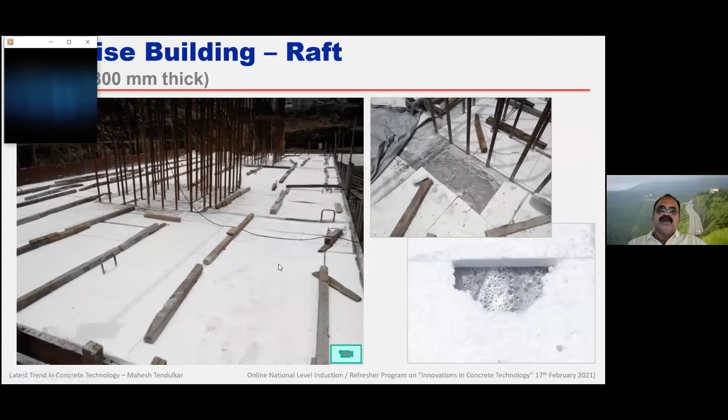Whenever there is 90+% humidity, curing is not required. Absolutely zero curing is required. That's why in one of our earlier projects, this mass foundation was not cured with water for 7 days, but still strength was achieved and there was no crack. So everything was proper. You can see here, first the plastic sheet and thermocol sheets are on top, and no water curing. Sides are intact.

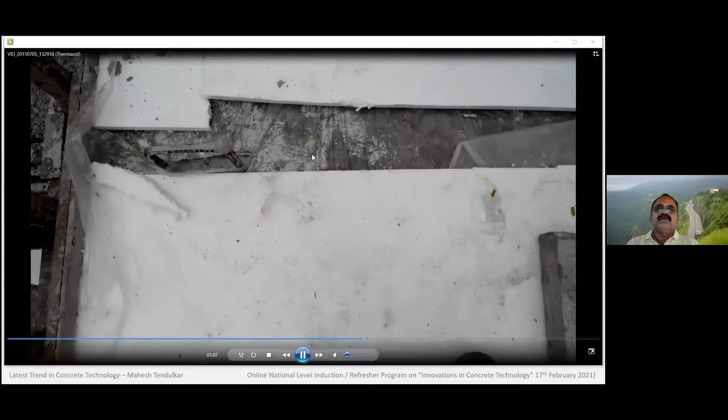And what is the benefit? Well, you can see the last slide. Absolutely, there is no evaporation loss from the concrete surface. You can see here, droplets of water in between. So this is the indirect curing, and a very effective curing method to reduce shrinkage cracks.

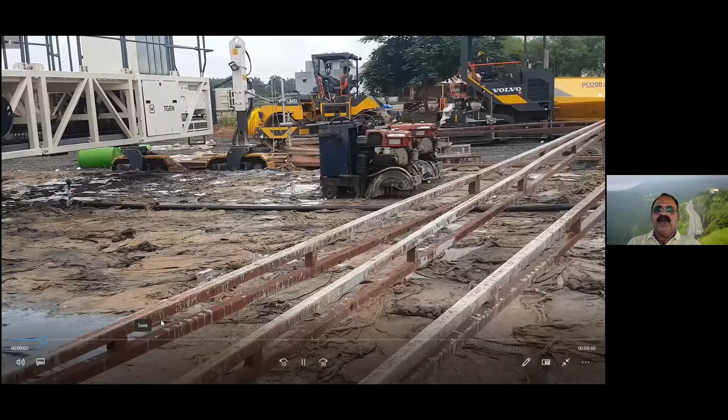Of course, in one of the projects I can show you, sprinklers are installed. This is a road project. Again, this is an effective system with the least manpower and with 10% of the water. This is a simple arrangement where they have laid about 1 kilometer of pipeline with nozzles. I can show you the on-off system for these nozzles. So only two people were controlling it, one at the pumping point and one at the opening and closing of the nozzle. Otherwise, imagine making this concrete wet by tankers, how much time and water would be required.

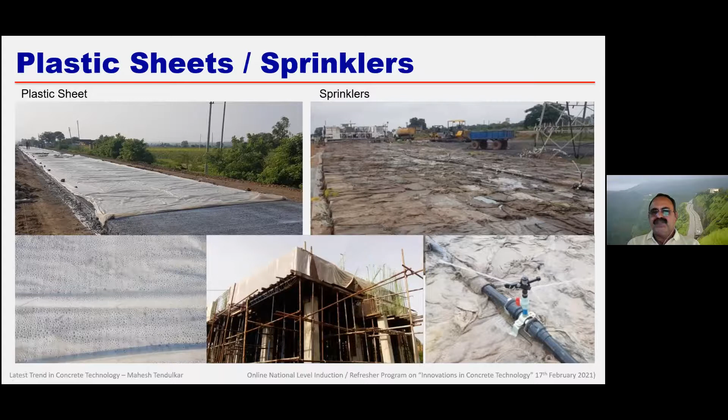So this is how we can use this system. These are the nozzles. The red one is the on-off switch, so whether this sprinkler is to operate or not can be turned off like a normal water cock. Even vertical members - in one small bungalow also we are now starting, all columns we are going to cure with plastic sheet. So vertical members are also possible. We have to wrap the plastic sheet and avoid the evaporation losses.

Even in Mumbai, you must have visited and seen this. All metro piers, viaduct piers, are properly cured by this, for something like a 20-kilometer stretch of piers. You can't imagine curing such a high pier by normal water spray. A simple water pipe is laid on top, connected to a water tank and a pump at the bottom, and it can cure the concrete for 14 days or 7 days as required.

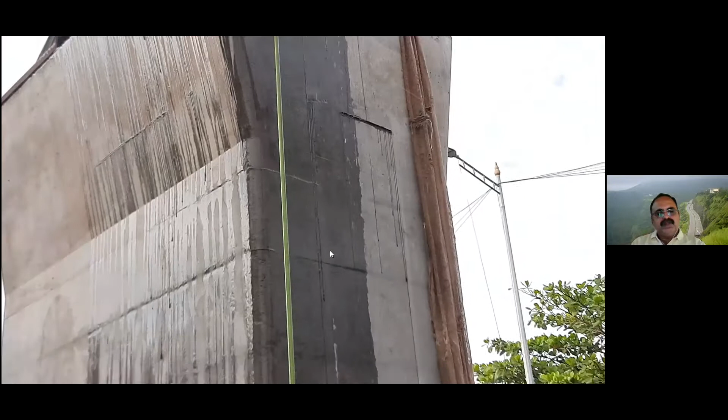So this is how effective systems can be implemented once we desire. There should be a desire to do good work, then it can be done.

And before the last slide, we have about 5 minutes left. RMC supply acceptance criteria - I always believe in transparency in business. Suppose one is a purchaser and one is a supplier, they must have a fully transparent contract. So I will always say specification and requirement should be properly and transparently shared.

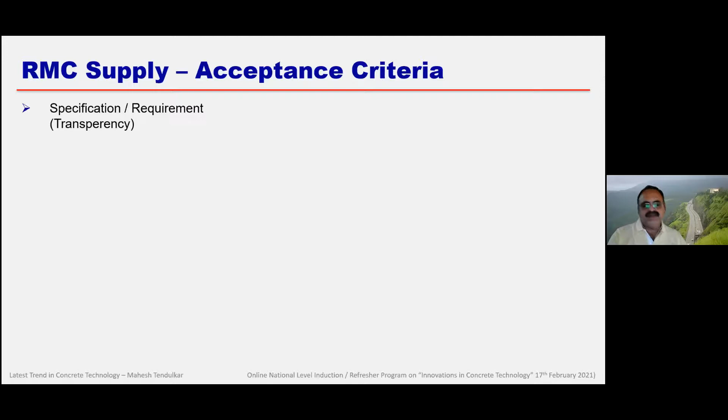Sometimes you may require a stressing time requirement on 7-day M35. Be specific and clear that you want a particular strength at a particular age, a particular grade of concrete, what material you want in the concrete, whether fly ash based or GGBS based concrete - everything should be clearly specified to the supplier by the purchaser. So I will always say be transparent enough and then specify your requirement.

Then approve the mix design of the supplier by conducting concrete trials. That is the reason I always say keep your concreting plan well in advance. Whenever we are taking the risk of such a high grade concrete, we cannot treat it like normal concrete. We have to take a lot of effort to plan well in advance and do the concrete trials in the laboratory.

At least 7 days results we should get satisfactory. Then only we can order the concrete from the supplier.

Sampling is a big problem. RMC code is there for sampling. The code also specifies we should take the samples from in between 1/3 of the transit mixer, but it is never followed at the site. Whenever there is a failure, everybody comes and points out that you have not taken the sample properly. So I will suggest being specific and specifying the methodology of sampling properly at the time of doing the contract.

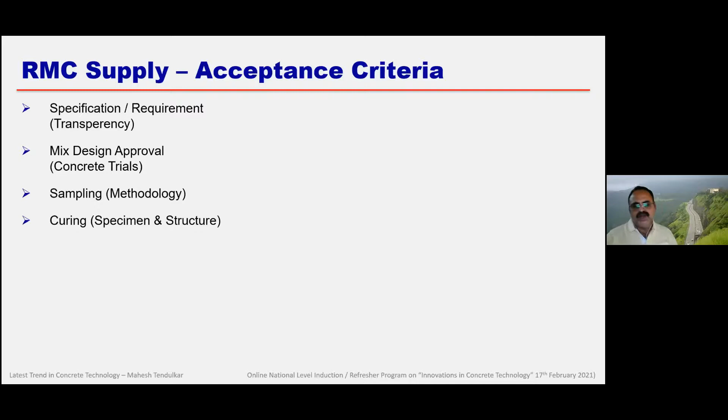Curing of specimen is a very important aspect. Who will do the curing at site, or will the plant or manufacturer take it to the plant? Because if you don't cure in the initial stage of concrete, say the first couple of days, then we'll not get the strength. Then testing with the proper equipment.

I think there was one lecture also on the compression testing machine, so you must have seen the difference if we don't test the cube properly. Lay down the acceptance criteria transparently—whether we want FCK plus 3 as per code, or if you are happy with the FCK, whatever is there, be specific and specify.

All these things should be shared before starting the work, and most important is investigation in case of failure. Very, very important. All issues will start because taking core from the structure, doing a hammer test, is not a proper thing, because again NDT has its own limitations. We can't get 100% accurate results.

So NDT should be avoided as far as possible. Earlier, NDT was supposed to be a tool for assessment of the health of old concrete structures, but nowadays all these NDT are being performed on new structures. So what should be done with NDT? Everything should be properly planned.

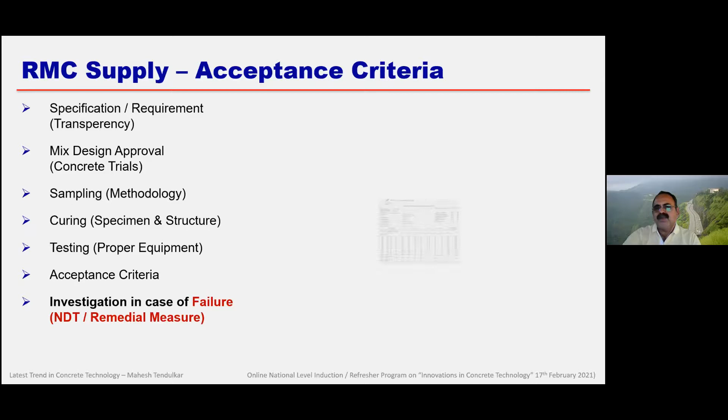Whenever a transit mixer or concrete is supplied at the plant, a batch sheet is supplied along with the transit mixer. One must visit the plant at random, check the concrete quality after batching, check this batch sheet, and the engineer at site should check each and every point in this batch sheet before accepting the material. So this is how we must take precaution in proper quality control.

Then workability test. Nowadays, the slump test is obsolete. Even the code says slump is suitable only for a low slump. We have to take the compaction factor test. If it is a flow concrete, it is a flow test—this is the flow test recommended in the IS code. So this is how you get the flow.

The advantage of this flow test is that we get an idea whether the concrete is segregating or not. You can see in the central picture a good concrete, whereas in this other concrete you can see there is segregation and bleeding happening.

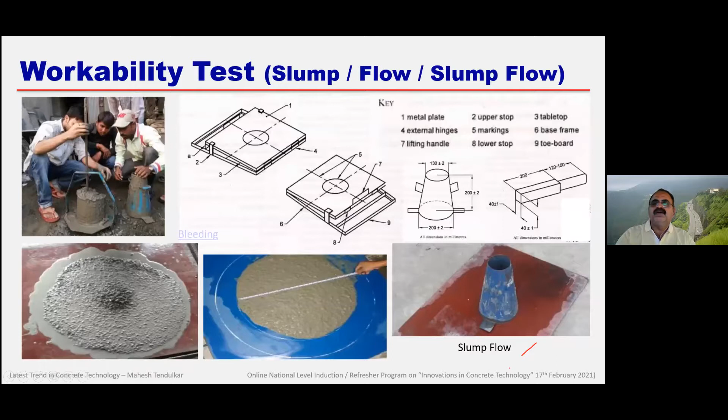Of course, sometimes you see the flow taken on simple plywood with the cone. This is actually a slump flow test. It is for self-compacting concrete.

I want to show you one example. See, if it is a good concrete—this is a self-compacting concrete—you will not see any segregation. It is like an M60 grade self-compacting concrete.

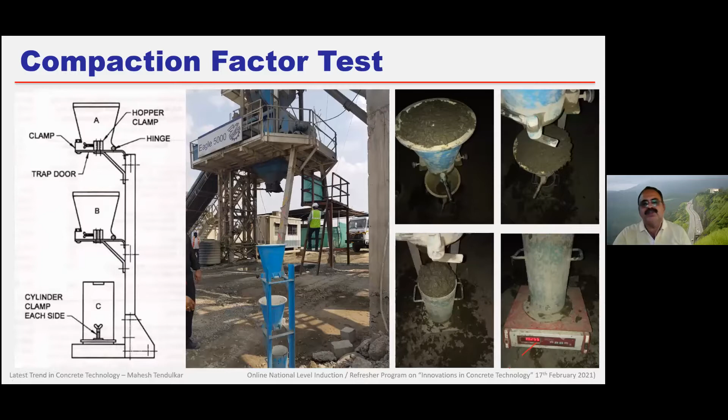So all these tests should be available at the site. If you are doing road concrete, compaction factor is the right test; slump test is not the proper test. So everything should be done as per code.